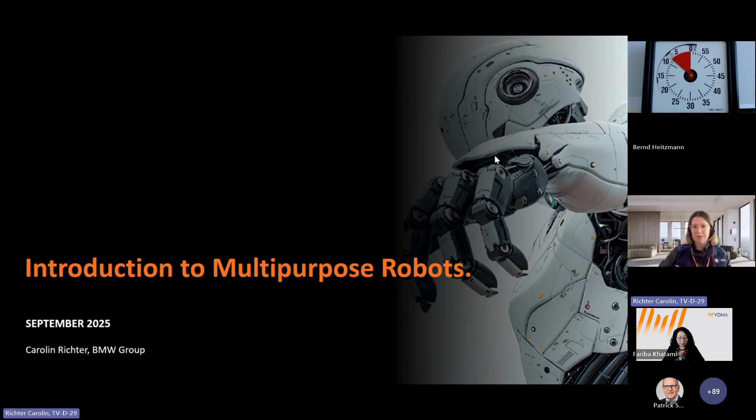Speaking about the future, of course BMW has a plan for the factory of the future. We have our so-called iFactories. That means we plan all our plants virtually. We use data analytics and AI to optimize our processes and production. And latest since last year, there's the dream of the intelligent robot, the dream of a versatile, flexible, autonomous automation solution.

That can be trained with less effort for new use cases, almost like you would train a human associate. And that would enable us as BMW Production to finally automate manual tasks that have previously been deemed impossible to automate due to cost or complexity.

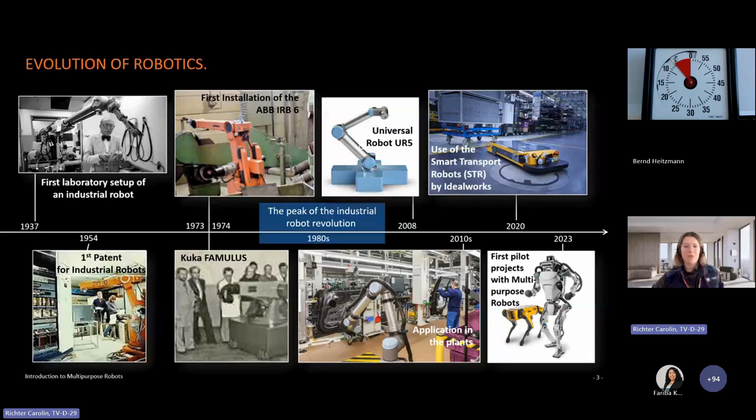Robotics is also nothing new for the automotive industry. We've shaped the use of the first industrial robotic arms up to our first try with the cobots. That was a not too successful story, to be honest, in our factories. So what really helped was the in-house development of our smart transport robot by Idealworks, that is now owned, I think, 100% by HR Robots. That paved the way to gain back the trust that we lost a little bit with the cobots, to be honest. So we can try out our first POCs with what we call multi-purpose robots, since the amount of legs is not too important for us in industry.

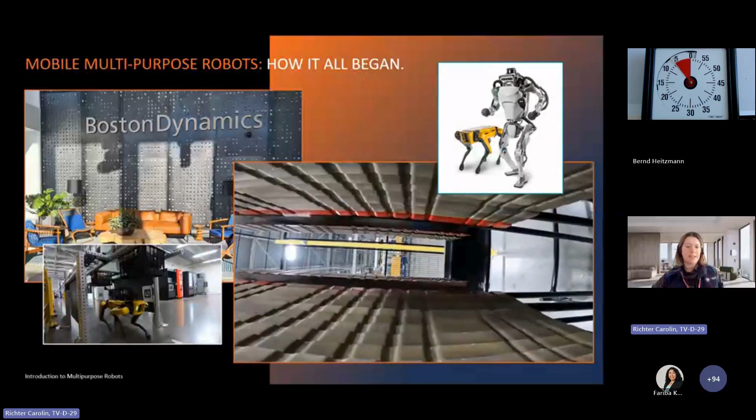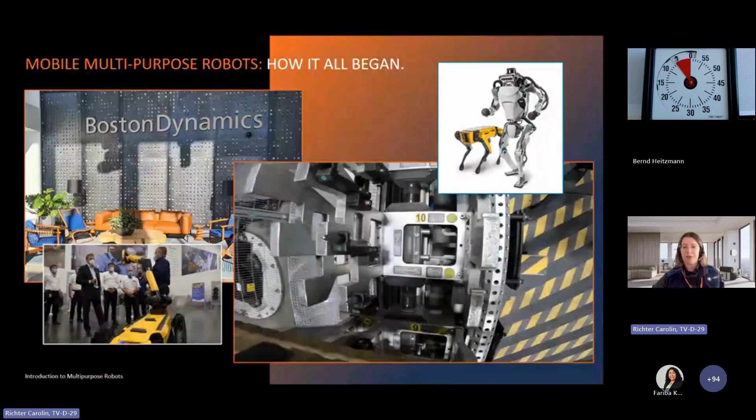It really was our US colleagues in our facility in Spartanburg, South Carolina who started the first tryouts with multi-purpose robots. They tested Spot from Boston Dynamics, putting it through its paces with maintenance tasks, logistics tasks, and handling tasks. They even went as far as remodeling one of the insert stations in the body shop for Spot to be able to put in parts. That opened up a lot of ideas about what could be possible if we can use robots as a brownfield solution for our workplaces, to substitute work if we don't find anyone willing to do that job.

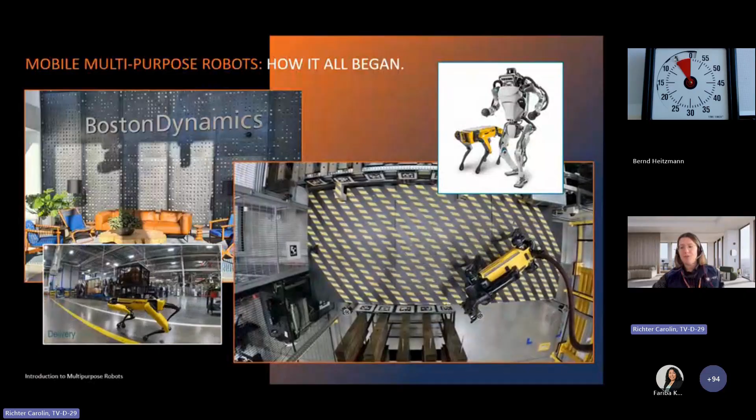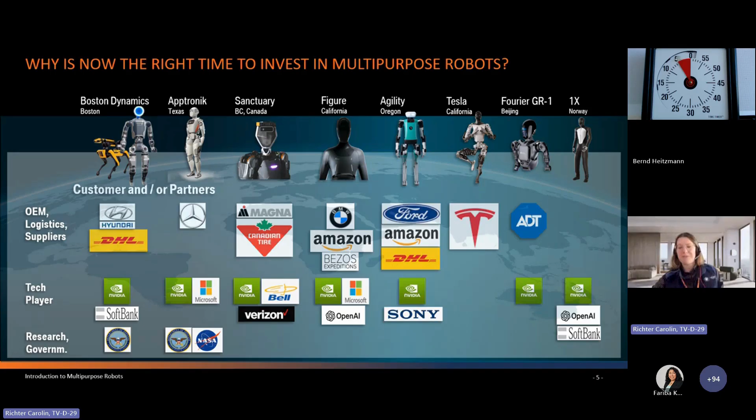Already in January 2024, we had a kickoff with Figure at their headquarters in San Francisco. We watched Figure making coffee. Of course, not every try went well, but whenever it worked and Figure could grab a coffee capsule, the whole office went nuts. It's a completely different work environment than most in our German plants are used to.

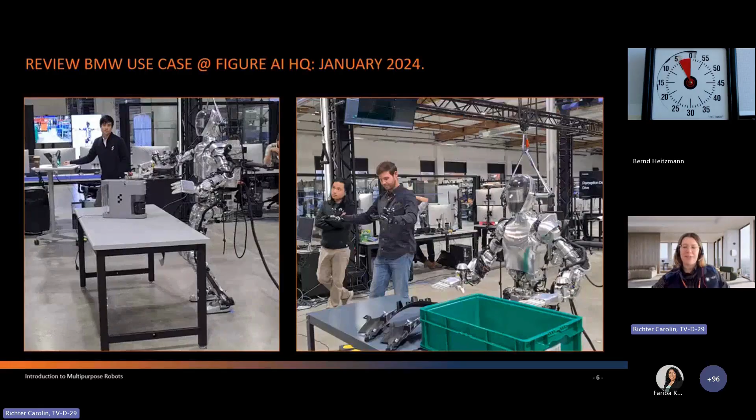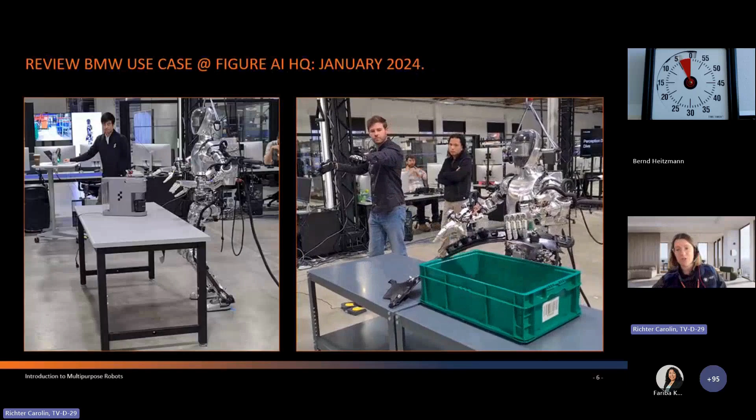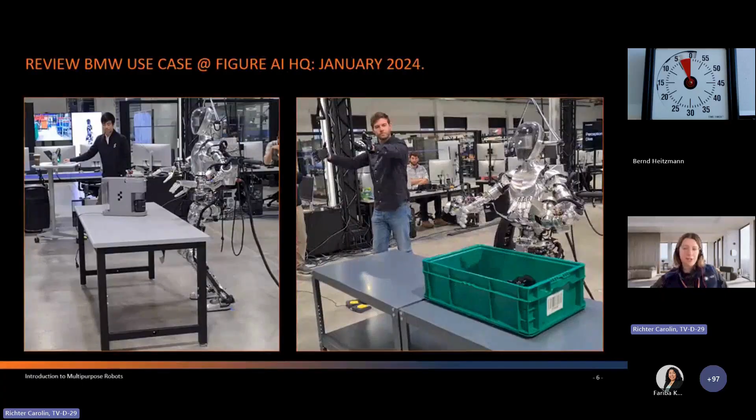On the right-hand side you can see how they're trained. I know it's from last year, but it's still kind of state of the art for what most humanoid startups or the bigger suppliers do. The human does imitation learning with the robots, teleoperating movements—there are different ways of doing that. On average, depending on the complexity and variety of movements needed, you can have a policy that needs to be trained up to 100, 150, 200 times to put it into a robot model, which is extensive.

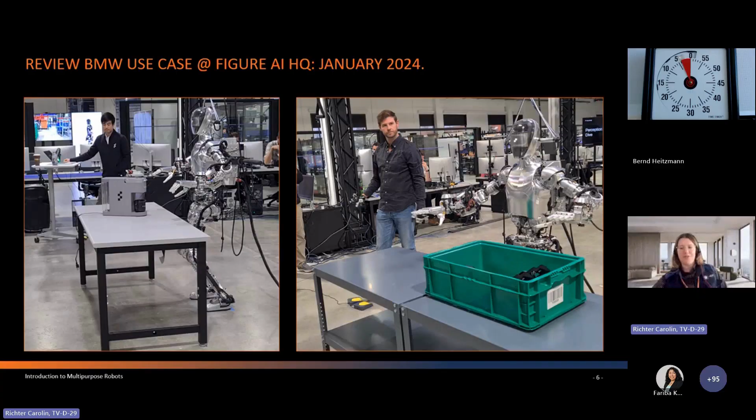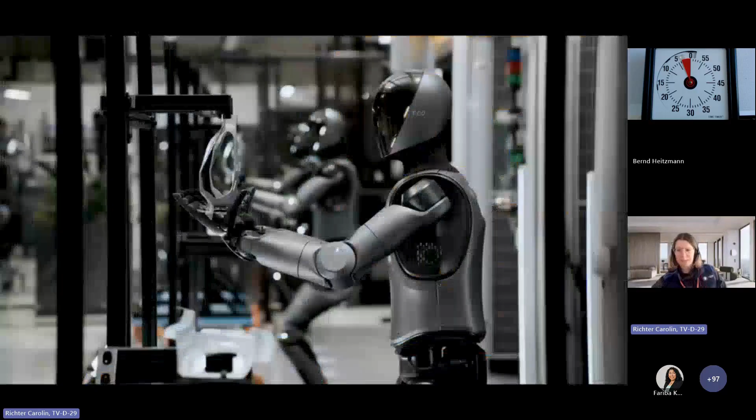We hope this development goes even further. Already by the end of the year, Figure had duplicated our BMW insert stations at their headquarters in San Francisco multiple times to do duration testing and durability testing of software and hardware. It's amazing with what speed they operate.

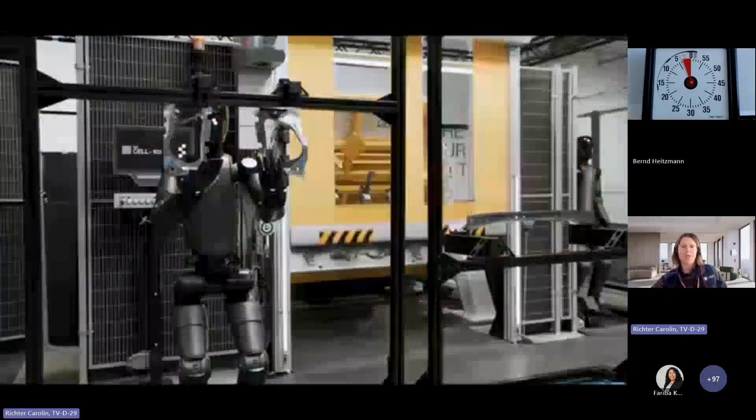We have this body shop use case that we chose as our first use case, since body shop is really well known to automation. We have structured processes, well-described processes, and environments that can be controlled. We did not choose a logistics use case to start with, since in the beginning Figure already had another partner for logistics. So body shop was our first use case to start with.

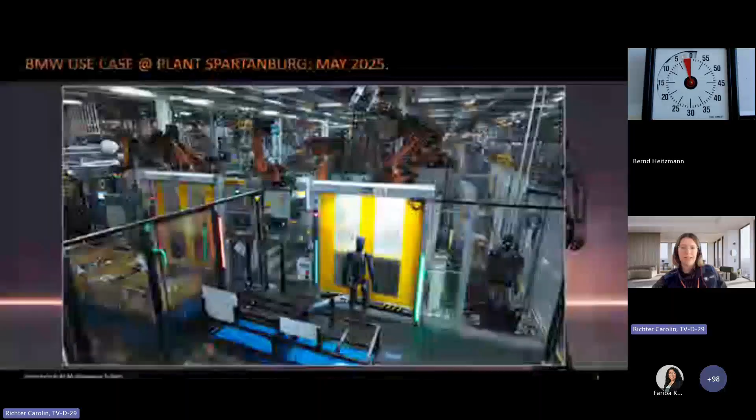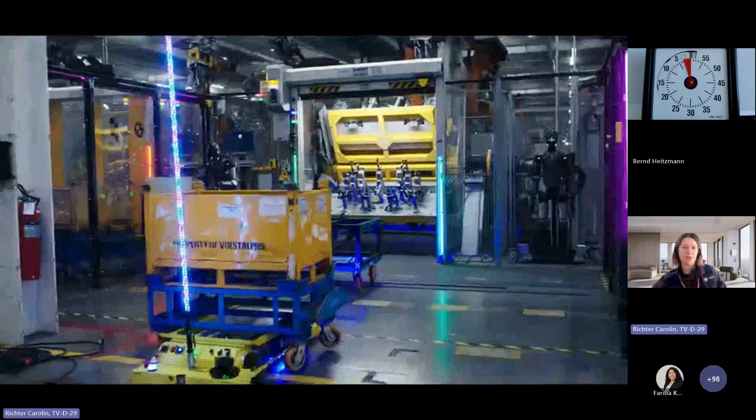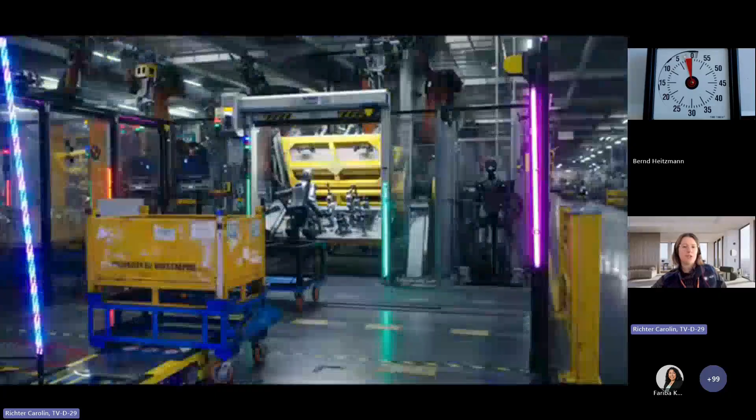Now we have a robot up and running as a pilot in our plant facility in Spartanburg that works alongside its human counterparts. Of course, there's still a security fence around it—it's still in a pilot phase—but it's working A and B shift, the whole production day. For this trial, we connected the robot with the PLC of the body shop insert station for communication.

For the future, I think we'll use a different technology for that. As you can see, we don't have a fully end-to-end automated use case here—Figure still needs to be handed the parts for pick and place. But this is the very next step in their development: to have a fully end-to-end automated use case so Figure can grab parts directly out of these boxes.

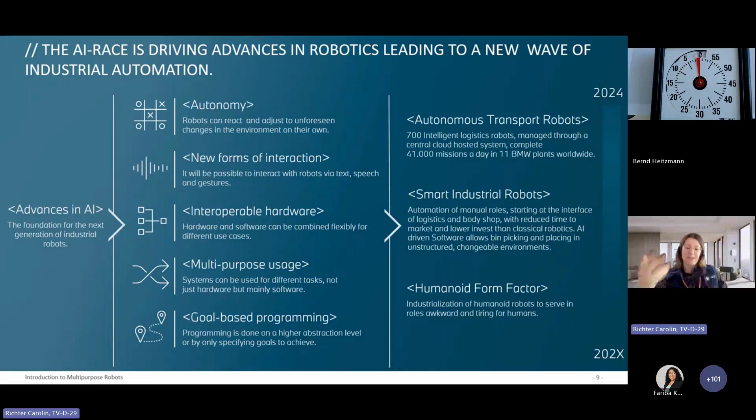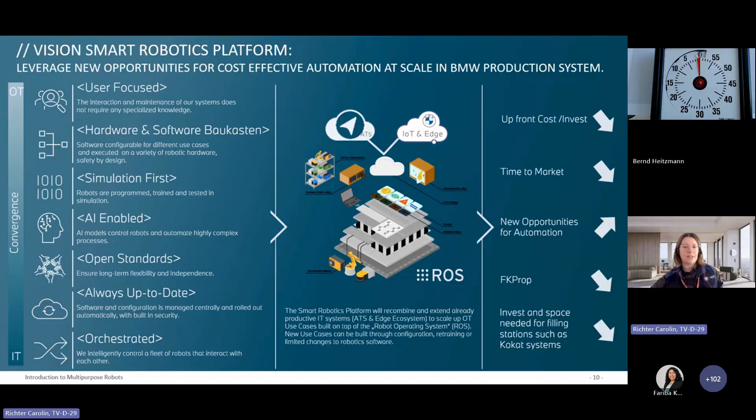We see a big paradigm shift in robotics as a whole, one that has traveled on the backpack of the Gen AI developments of the past two years. Because we're really interested in making the robots more intelligent on the underlying software side, we already invest in our own BMW software platform that, as I said, will be the white box connector to all the black box systems. It runs on ROS2 as middleware, an open-source library of different modules that can be combined with any hardware supplier as long as they have a ROS driver. Some of you may have already heard of ROS—I think we're among the first to actually use this as middleware on a platform basis.

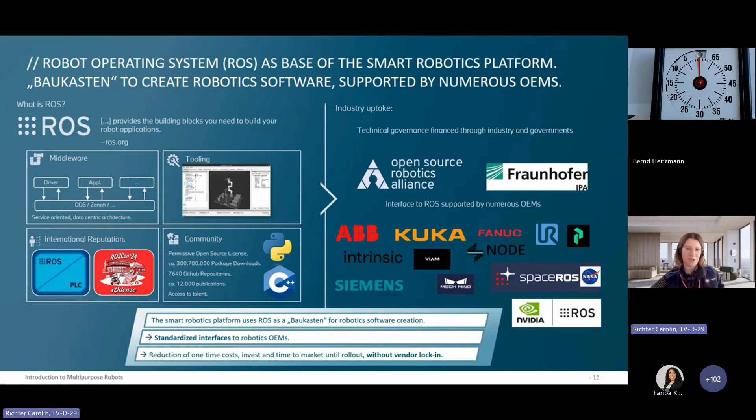If you want to join, we are happy to see other customers using this product to make it more industrially available. The next big thing for us, if you look at the evolution of AI that we use in production, will be physical AI.

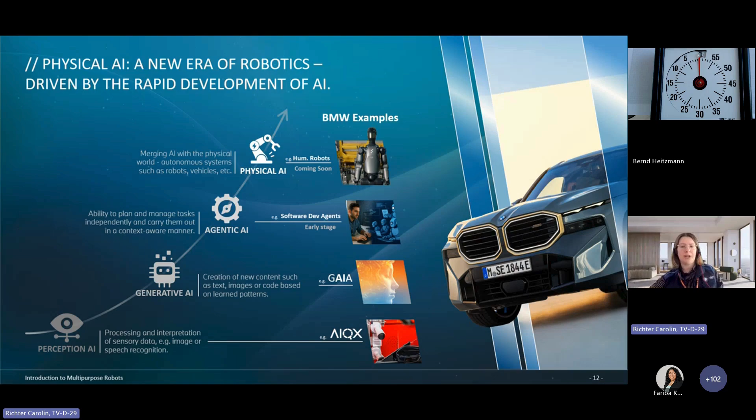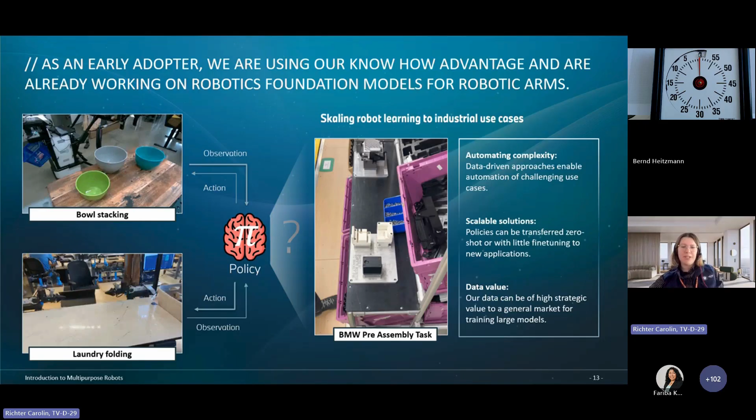What all the large language models cannot do, besides their big knowledge about the world, is they have no understanding about the physical world, about the spatial relationship of things. There is no internet for robotic movement data. That's why we're really interested in companies like Physical Intelligence that offer open source stacks of teleoperated data.

Our idea is to bring this to our production processes. You can see a pre-assembly process that we have in our assembly lines. As easy as this looks from the outside—bring two parts together, three screws—we could not automate this with conventional automation technology on a cost-wise basis.

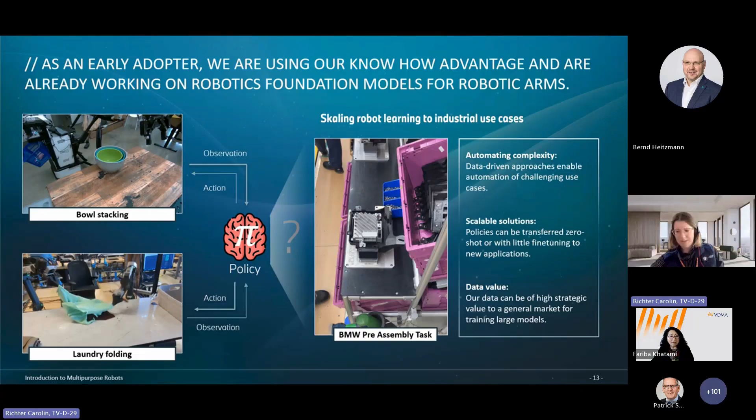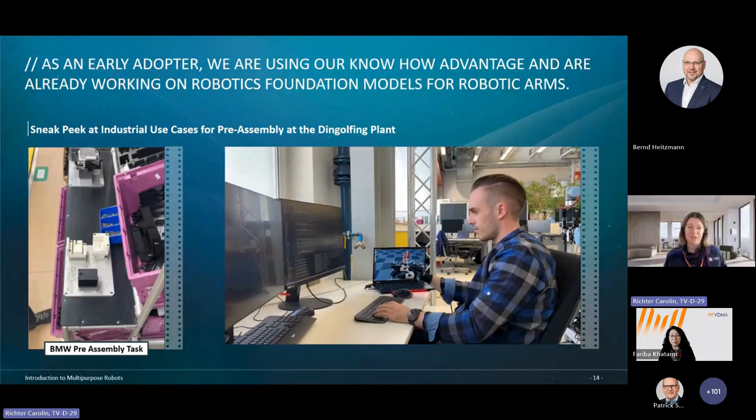That's why we gained some expert knowledge already in our own lab. We try to use AI models to also steer robots. We are investing ourselves time and money into the exploration of robotic foundation models because we think that will be the game changer of the future—to actually have knowledge that travels from one robot to the other, from one movement to the next, to be faster and easier with use cases in establishment.

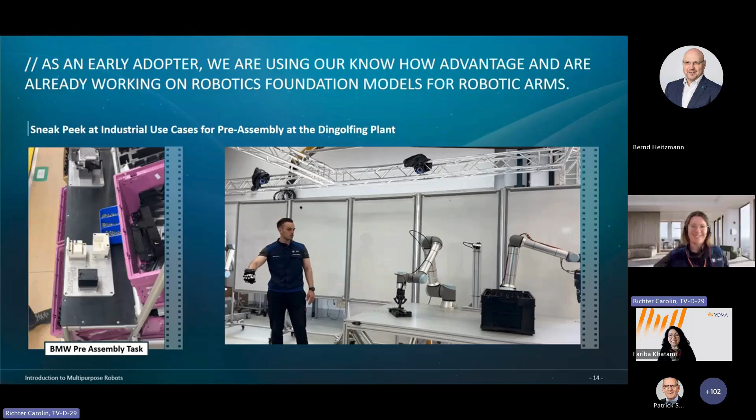I have one question on my own. The robot working alongside humans on the shop floor—how do the people feel about that, working with a humanoid?

So far, they're quite interested in working with robots. We also had some expectations that it could be otherwise. The first thing we talked about before we started any POC was talking to the union in our production lines, and it was a quite positive encounter, since they already see that we're going to have workplaces in the future where we will have a hard time finding people still doing those jobs.

If there's 10 people missing in the morning, it's not just a problem for those 10 workplaces, it's a problem for the whole productivity of a production plant. So that's why there is a good fit, and we still have a couple of those really unergonomic, dangerous workspaces. We have high voltage workspaces right now, so that could be a good fit for any form of multi-purpose robot.

So we have a couple of questions in the chat. What's the status of your ROS product at the moment? Does it enable humanoid actuation like arm control? Not yet—that is something we want to do for the future.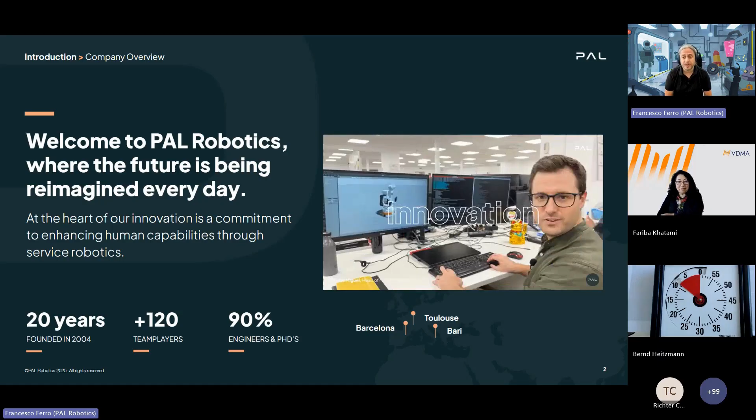Nowadays we are based in Europe. We started in Barcelona more than 20 years ago. We now have different branches in Toulouse, France, and Bari, Italy, and we do robotics from scratch. This is more or less our portfolio, and we are also part of associations that allow us to stay aware of what is going on in Europe.

Let's start with some video that I think is very important because it shows that this kind of technology was already there in the past. We did our first humanoid biped robots in 2005, and made another one in 2008.

Then we decided that humanoid form is not only on legs, so we also thought doing it on wheels was important. The most important thing in this kind of development is interaction, because one of our most difficult competitors is the mobile phone, so the robot has to be something different — socially, but also from an interaction point of view. Our idea about service robotics is that robots have to collaborate with people. This was, in our opinion, the most important thing in order to work.

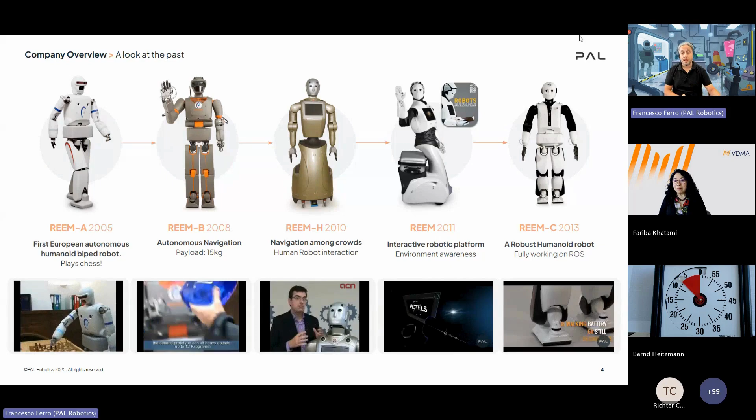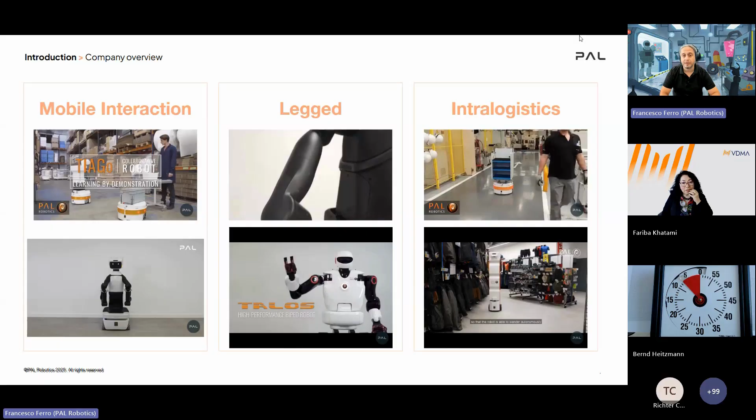Based on that, nowadays we have 3 different internal business units. One is mobile interaction, performing the interaction we need in industry, at home, and in hospitals. We are still developing legged robots — in the last 2 years we've seen an explosion of companies doing this kind of development. And we are working in intralogistics, especially with wheeled robots.

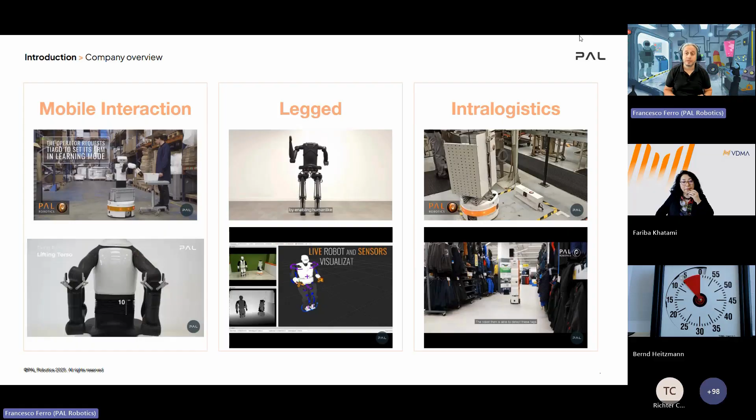We have different robots, one of them is the Stockbot, which we've deployed widely all around the world. We have more than 200 robots in 15 countries doing inventory every day — in Singapore, for example, 24 hours a day.

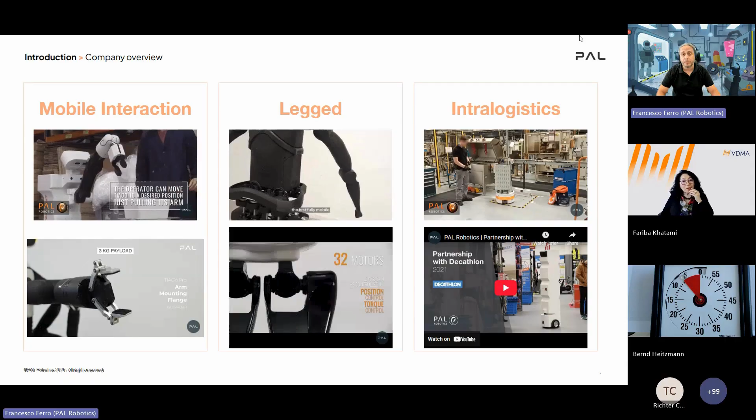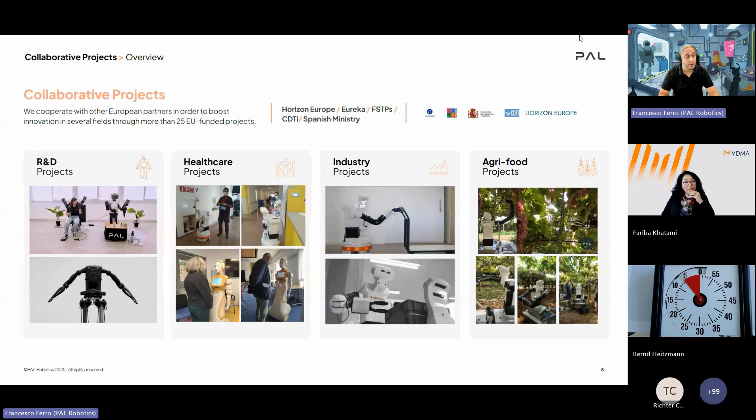Apart from that, we do this thanks also to collaborative projects — we've had more or less 25 European funded projects, categorized into different areas. We would like to be at the state of the art, so we have a lot of R&D projects, but we are working hard in healthcare and industry in order to make this kind of solution available to the real public.

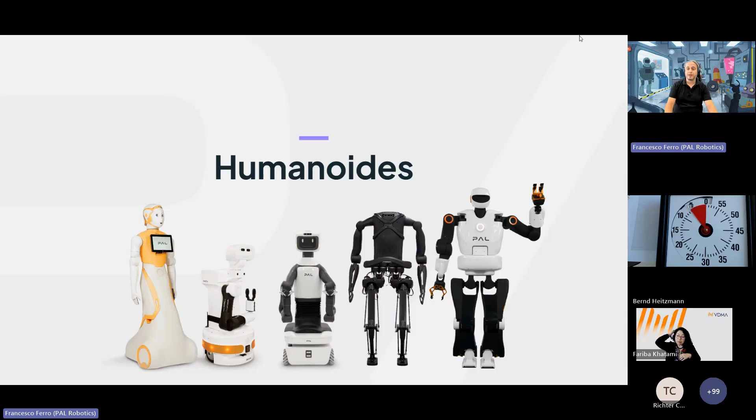Now let's speak about humanoids, because I promised you different humanoids. The idea of humanoids is to have versatile, multi-purpose robots nowadays — adaptable, bipedal or wheeled, but useful for different tasks.

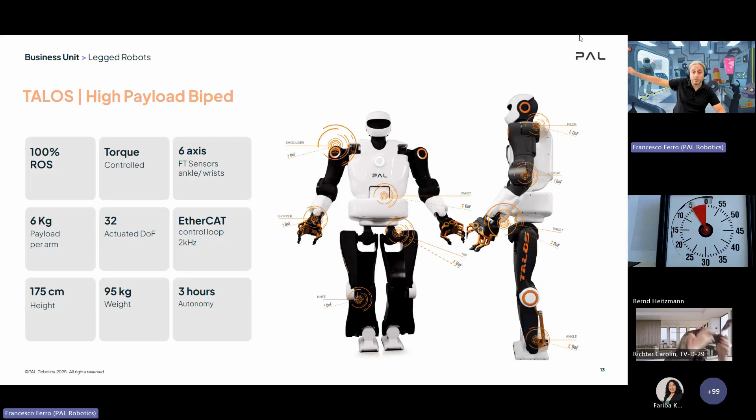We have different partners we work with, and different solutions to show you. One is Talos, in my opinion still one of the unique robot developments all around the world, done in collaboration with University LAAS in Toulouse. For this reason we also have a joint lab with them. This is a very tough robot — it can carry, with a single arm stretched out, up to 6 kilograms per arm.

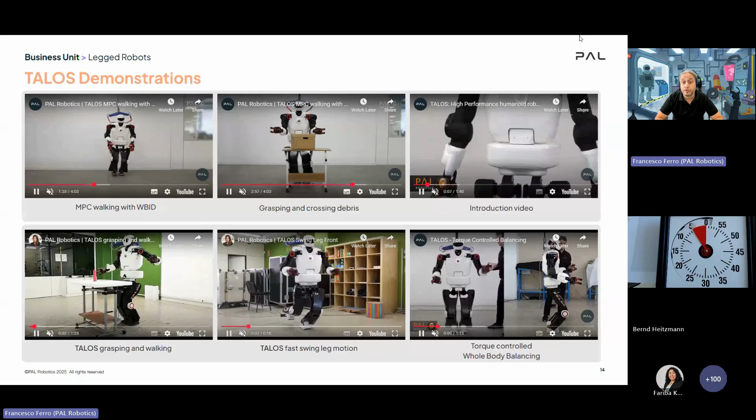This helps the robot do different tasks, and it's all in torque control — that's exactly the next step in robotics. It helps us and our partners use the robot in different ways for different reasons, giving the possibility of whole body balancing and control. This is the most important part.

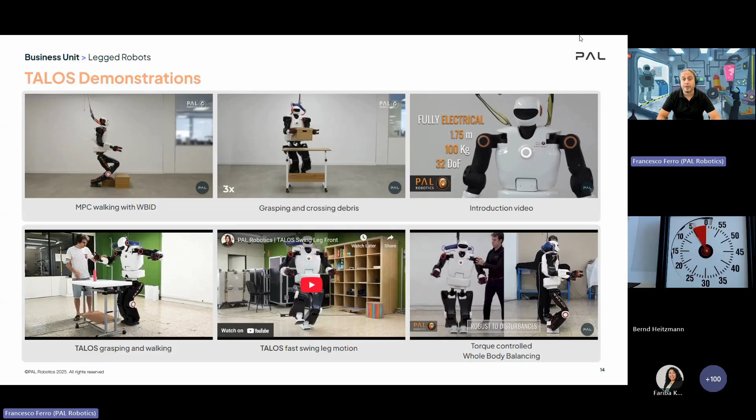It's fully electrical, and from scratch we use ROS — we've been using ROS from the beginning. Actually, yesterday I was in Edinburgh, and Steve Cousins, who was CEO of Willow Garage, mentioned us — that's something very important.

Another development I want to show you is the Kangaroo, which is our latest project.

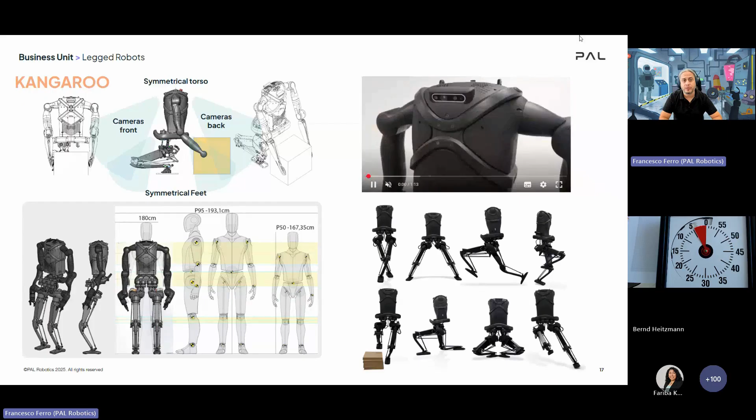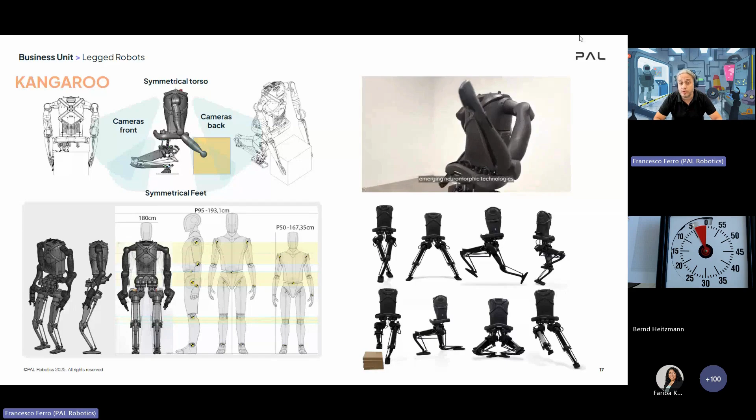One of the important things is that we decided not to have a head, because if you don't need this kind of interaction with the public, you don't need a head. It can be nice to have the workspace to take bags from one side to the other. So you don't have a front and back of the robot, but can use it really like a multi-purpose robot.

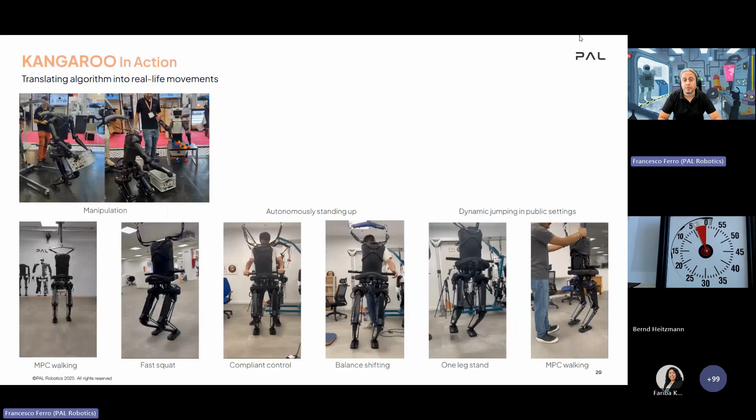We have done a lot of simulation. We are giving this for free in order to control the robots, and we are doing a lot of optimal control. We are quite good in reinforcement learning, and now we are hoping in generative AI, but also embodied AI and physical AI in order to try all these kinds of things on real hardware. So we are not stuck with only one middleware, but we are using a lot of different AI middleware.

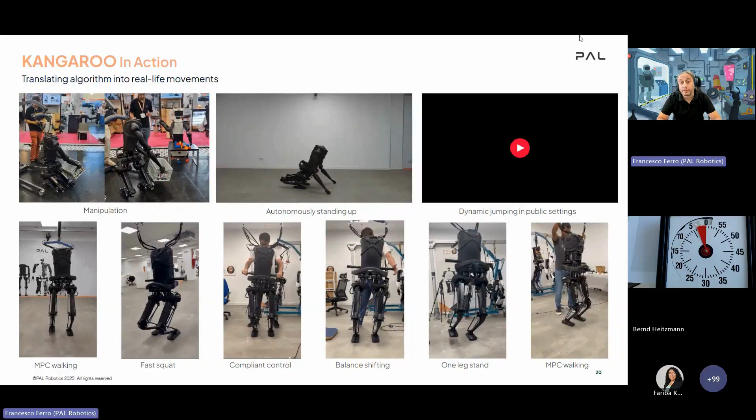The idea is, for example, in Automatica, we show the robot that could take things from the floor and put them on the other side. The robot can stand up, go down and stand up. It can jump, for this reason called Kangaroo. But the most important thing is being able to do compliant control, and this is one important thing with legged robots.

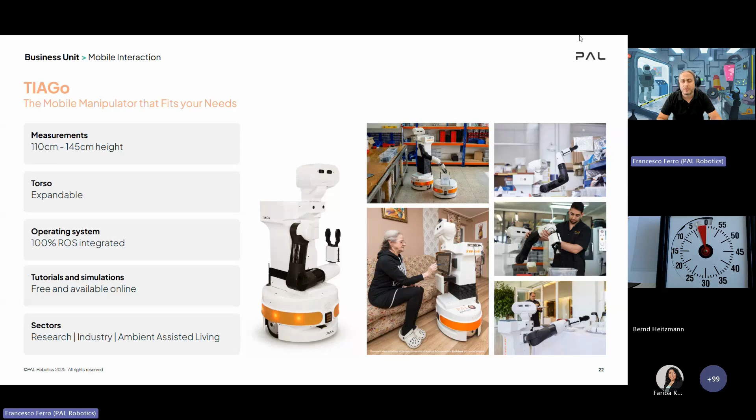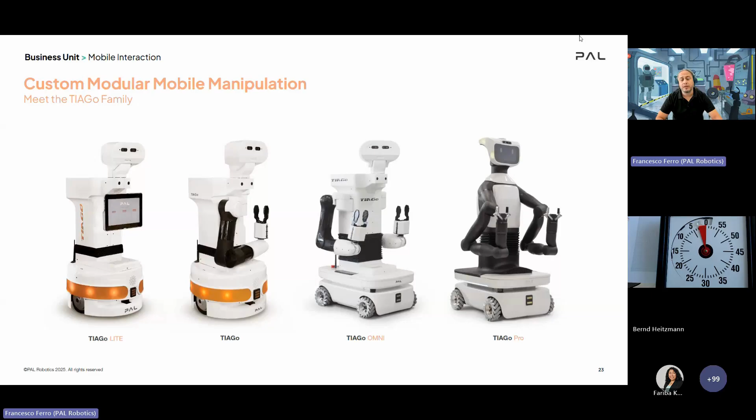But like I said before, in my opinion, humanoids are not only with legs, but also with wheels. So for this reason, I would like to show you the Tiago stuff, which is the acronym for Take It and Go. Probably you have seen, we go to a lot of events and trade shows. The idea here is exactly the modularity. Why can't I use an end effector from another company instead of building everything at home? The idea is to use different things, be compliant with other companies in order to use it, and always on the middleware. So the modularity from a hardware and software point of view is exactly one of the big pillars of this solution.

Just to show you some of the videos that we did in some European projects, but also some client projects, even in agriculture, here you can see the Tiago doing different things.

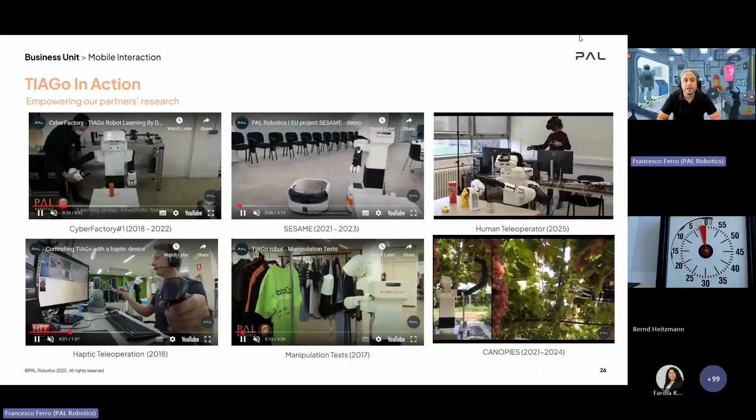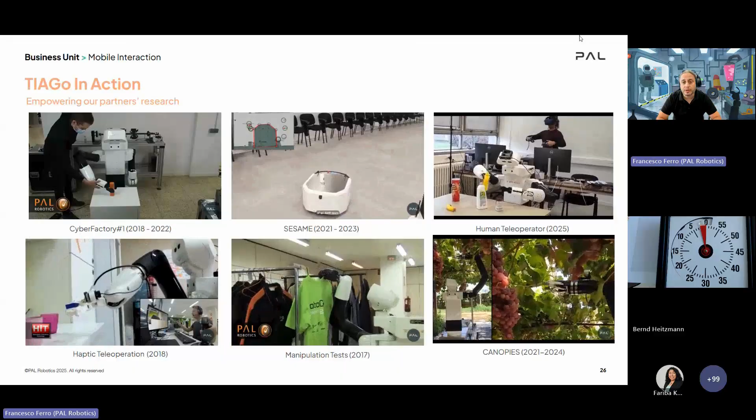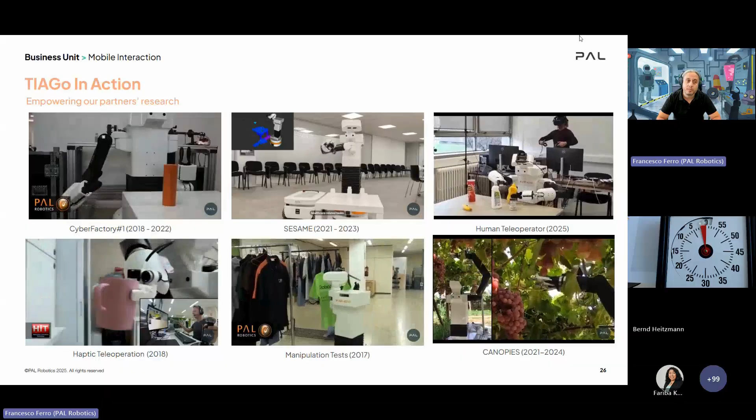Most of the time I visit a lot of universities all around the world, and they always say, okay, I would like to do this kind of research, but I can't because the platform is too expensive. So I purchased this one that's a little cheaper, but I can't do exactly what I have to do, or I reinvent the hardware. Our idea is exactly the opposite way around: try to do things with the same hardware and have the possibility to expand it using a new sensor.

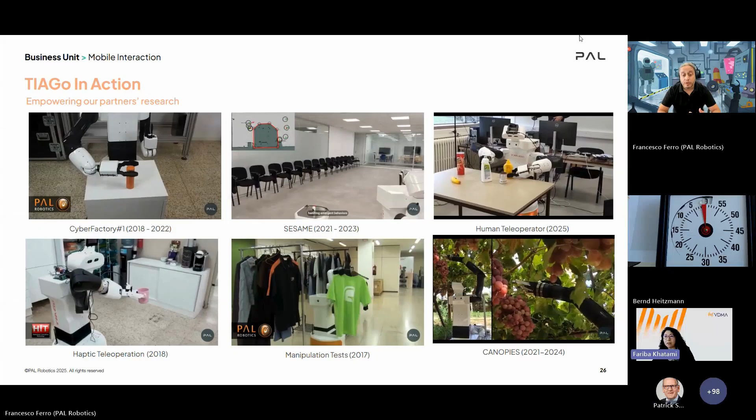Francesco, I think your screen was frozen. Oh, now it's okay, now it's going again. Sorry for that, now everything is okay.

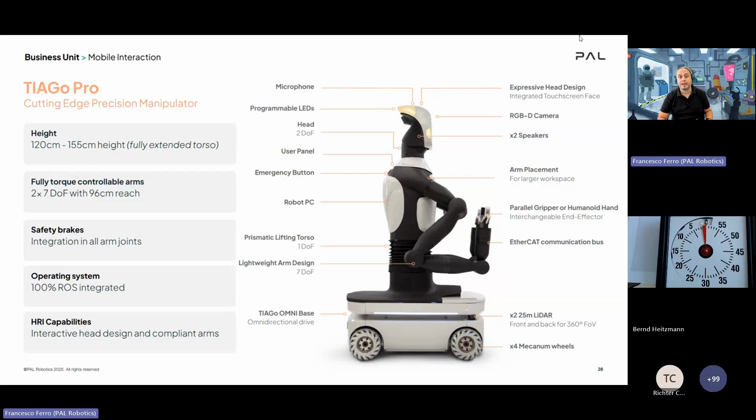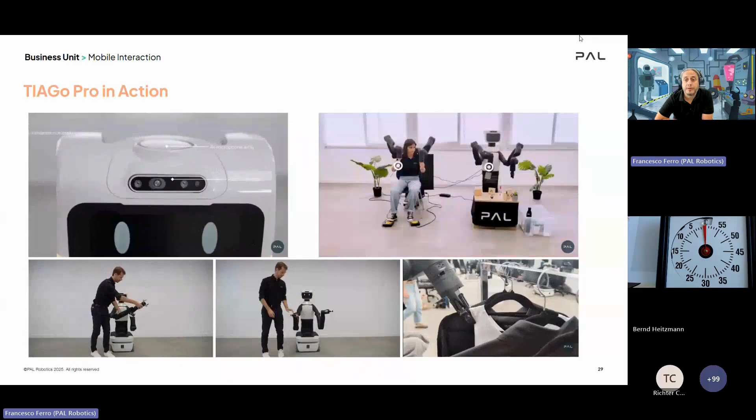The new development that we did is the TIAGo Pro. So we even increased, especially the workspace of this robot, and made it a little more appealing. This is our latest proposition for robotics and AI nowadays in order to do this kind of development. We are compatible with a lot of different AI middleware, like I said before.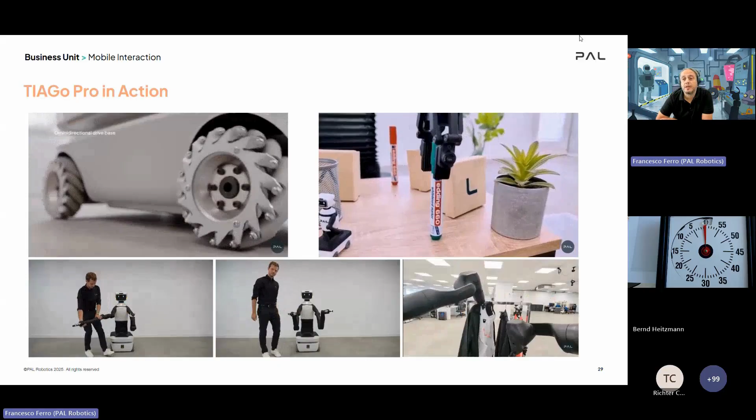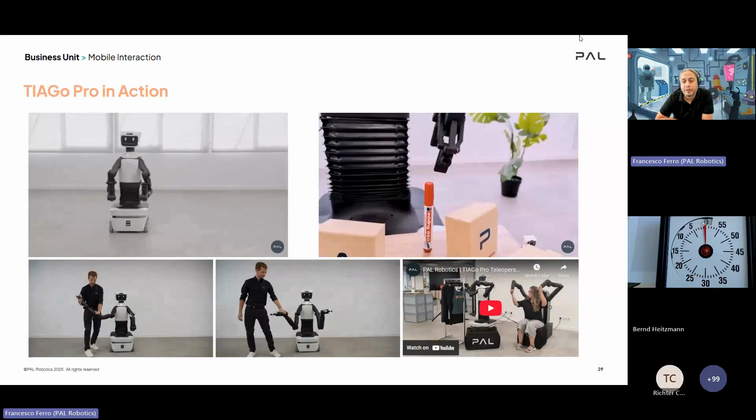For this reason, we also made a test bed at Automatica, where you can see a very simple way of teleoperated robots. We have exactly the same arm of the robot in a station, and you can control the robot in a different way in order to do different things. It's very intuitive, and I've seen a lot of people in the public already test it. The idea is exactly to use these kinds of things to do things properly.

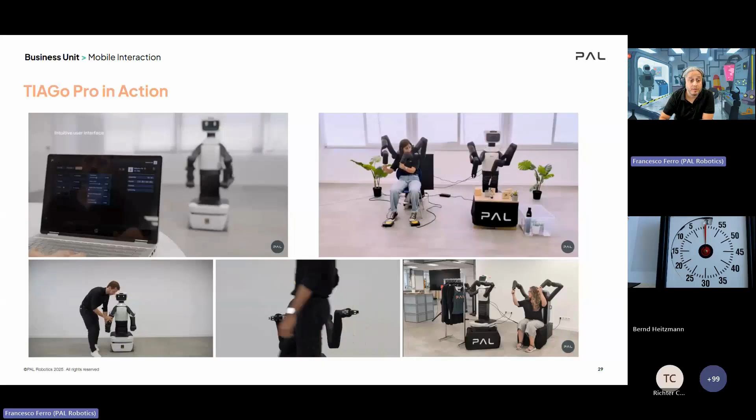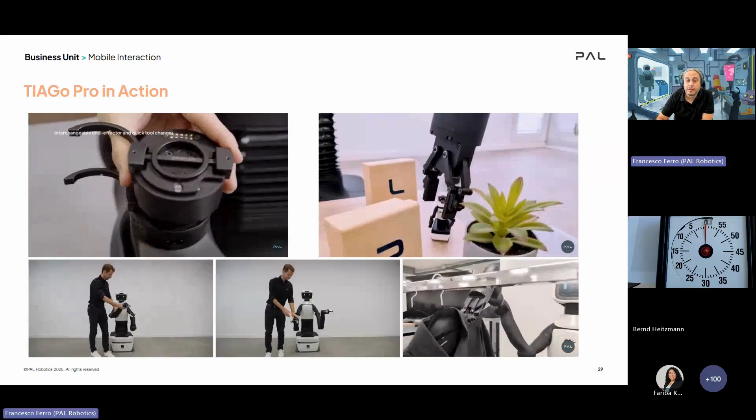We are working a lot in retail, because we also have contacts through our other business units on that, which is very important. For this reason, you can see the TIAGo Pro taking clothes and putting them in different ways, and we are proud to do this kind of thing, also in collaboration with other companies.

I think I have 30 seconds left, so this is the use cases. The last message I want to send you is these three pillars. From one side, the market doesn't care if it's legged or wheeled or quadruped, because I've seen in the previous presentation there was a quadruped. The manipulation is the real challenge, and AI now hopefully can help us do it very, very well. And we also have to allow users to personalize their robots, and this is the most important part.

For this reason, use open source, ROS 2 or ROS 1, whatever, but make the things and the ball going.

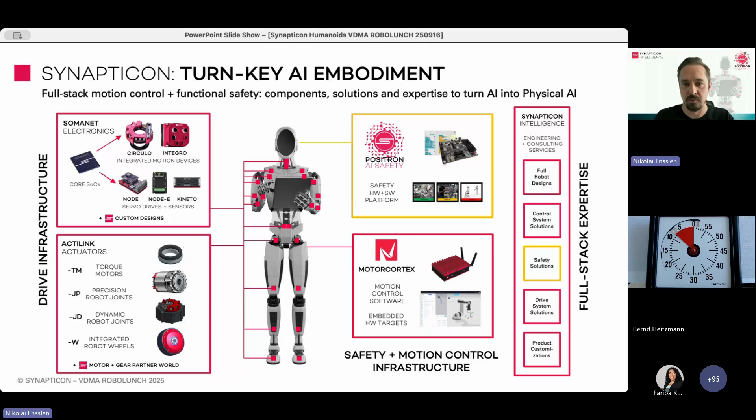Now, I would like to start with the question: do humanoids make sense, and why do they make sense, and why is this happening now? There are two key reasons why we are suddenly seeing so many humanoids popping up everywhere, so many companies - more than 150 in the world already, similar to when the automotive industry came to life about 100 years ago.

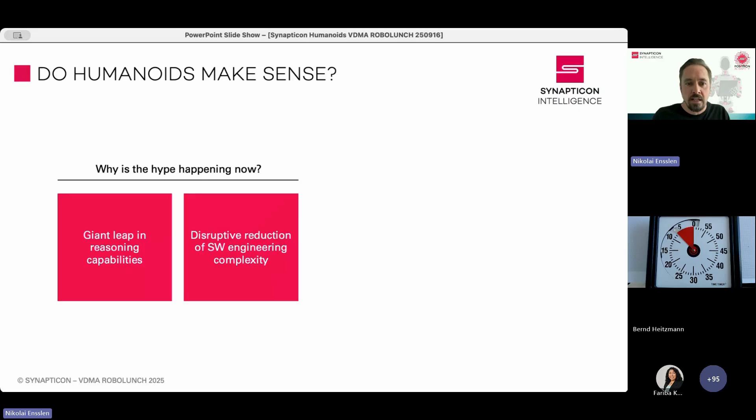There's a giant leap in reasoning capabilities. This most recent evolution in AI led to new capabilities where a robot doesn't need to be programmed anymore. What is less appreciated is that there's a disruptive reduction of software engineering complexity. A humanoid robot was extremely difficult to program with conventional software - now it's super easy. So the capabilities of the technology are going up, and the efforts are coming down, as usual when a disruptive technology comes to the table.

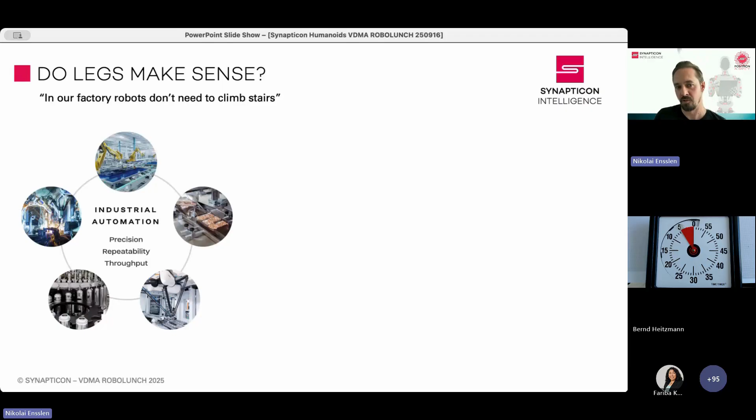And that is an impressive development, obviously. Now, why actually legs? This is a discussion that we're having in Europe a lot. Do they need to be on legs? Like Carolin said, also in our factory, they don't need to climb stairs. They can have wheels as well. That's right, so in industrial automation context, that is true. But there we generally have potentially the smallest area of application of humanoids, because what mostly counts is precision, repeatability, and throughput. So how we automate factories until today.

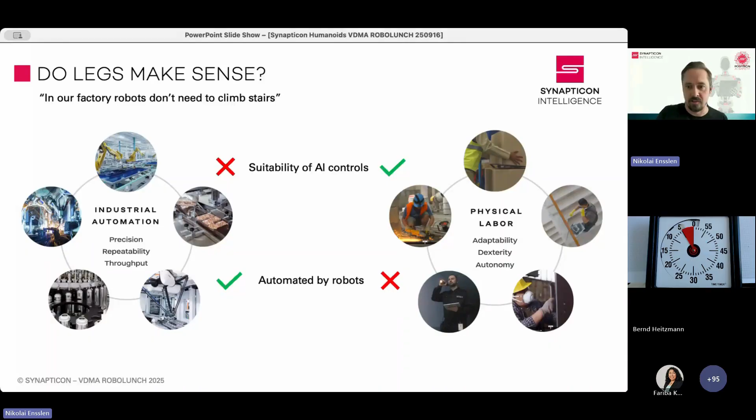Actually, humanoids and AI controls are not particularly good for that. That's also why we have automated factories without humanoids. The big thing for humanoids is actually outside of factories. It's, of course, the remaining stuff inside factories that humans are doing, but even more, it's physical labor in other areas where we do not have robots at all so far. That is a huge market.

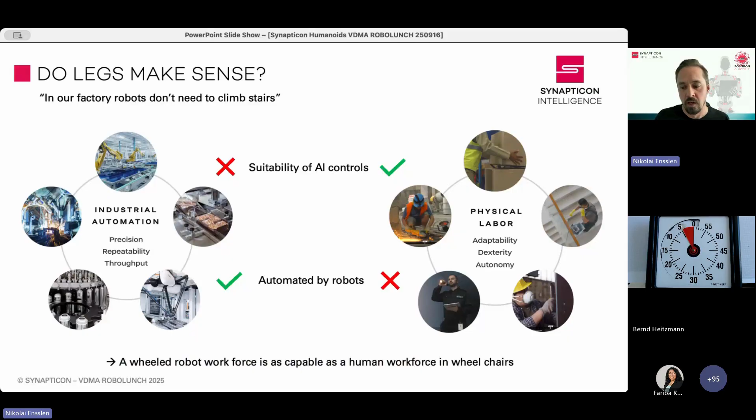If we're imagining this, then a wheeled workforce is just as capable as a human workforce on wheelchairs, actually. So I think by that dimension it's relevant, not only for the AI and the teachability of the robots, but also in terms of how capable these robots will ultimately be.

Why is it important? Obviously, the labor shortage that we're already experiencing, and this is getting dramatic. If the world economy is growing with 2% each year, then we will have only half of the workforce that we need for simple physical human labor. And that is a huge impact for the global economies. This will be devastating, actually. So we urgently need to have a solution to automate physical labor. And that is a huge market, with $24 trillion already back in 2022. So we need to urgently fix that.

Now, where are we standing? Technical and commercial maturity - I'm usually distinguishing these three dimensions of maturity that I will elaborate on. AI capabilities, the cost, and safety are the three critical paths that need to evolve in order to bring the humanoids from applications where they are commercially viable today, which is security and inspection, for example, and entertainment.

If you look at the Chinese robots, they are massively focusing on entertainment in China, it's a consumer topic. Meantime, consumers are buying humanoids to have them fight in box fights against each other and stuff like that, have them dance and stuff like that. It's really crazy what's going on there and the focus on entertainment.

Then next up, what you see most startup demonstrations currently, is research with pilots, for example in the automotive context, logistics and material handling and manufacturing. But manufacturing is actually a long journey. So there are tasks that can be done today, and then there will be tasks that only become possible as AI evolves and as the costs come down.

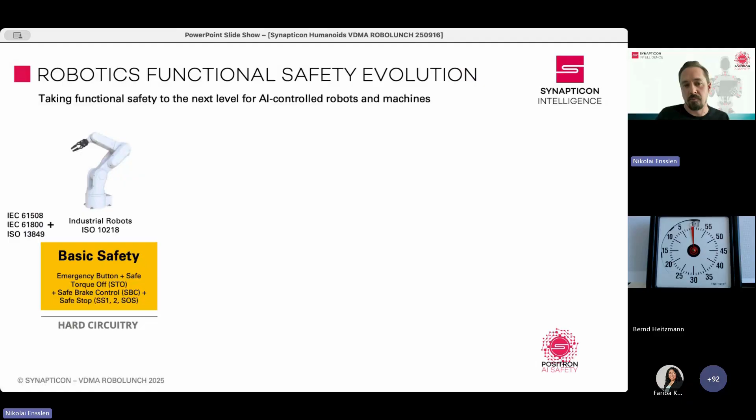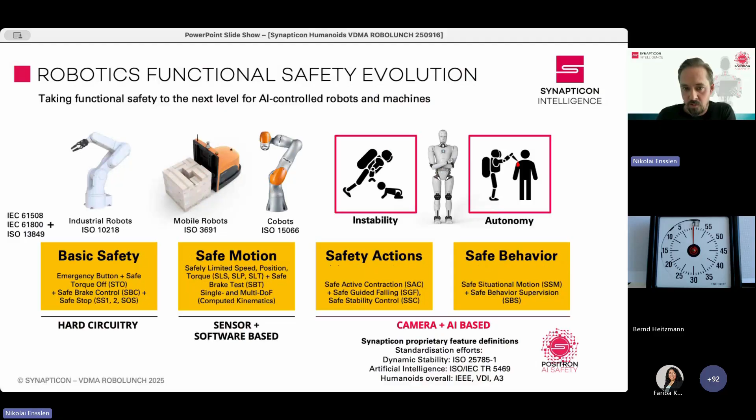Now, real quick, safety. We need to evolve from where we are in industrial robots, cobots, and mobile robots today into what humanoids need in order to address the instability of the legs and the autonomy of the AI controls. This is a new area where a lot is being done, where new standards are being defined right now. Synapticon is at the forefront with currently the only commercially available solution for humanoid and AI-controlled robot safety, and we're actively contributing to the standards being defined. Many applications can be covered today, but not all. We need new answers and to establish standards to bring humanoids into all applications. So there is still a journey to go.

Based on that, the best guess is that we have about 5 years to some commercial relevance—meaning these things are doing sensible work on a respectable scale—and like 15 years until this is a very significant industry defining our everyday lives. But that is just, how to say, a subjective prediction based on some approach.

Thank you very much for your attention.

I'm not sure actually if I was in the time. Have I been in the time? I was speeding up a lot. I think you're right on time. Good, well great. Done. Thank you very much.